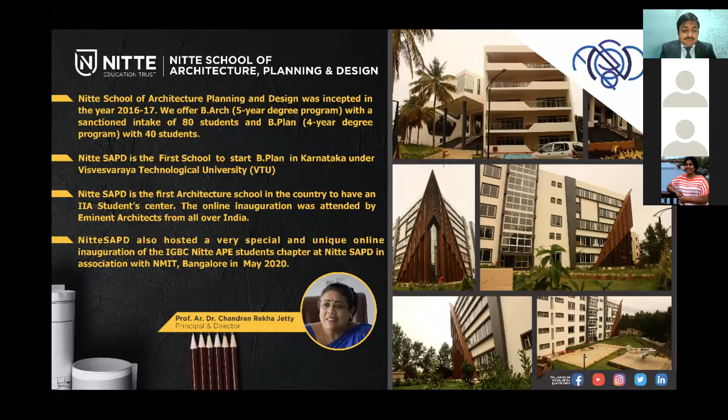We at Nitte School of Architecture are associated with initiatives like this from our inception in 2016. We have focused on doing our bit to promote and facilitate awareness about sustainability, and our students have done many projects in these areas. We do our best to give our students a complete understanding of the social, economical, and environmental implications of going green.

We also have a students chapter of IGBC, which keeps the students well connected to the development. We recently hosted an event, Bigathan, in association with Lawrence Berkeley National Laboratory, LBNL, USA, to launch the Building Innovation Guide for High Performance Energy Efficient Buildings in India, which is expected to innovate the building infrastructure.

The faculty in charge of many such initiatives is Dr. Gayatri, who is in this panel right now, and who is continuously associated with PJMT. It gives us immense pleasure to associate with Prem Jain Memorial Trust.

As you know, Prem Jain Memorial Trust was set up in 2018 in memory of Dr. Prem Jain, father of green buildings in India, as already told by Mrs. Pyle. Its mission is to create, establish, and maintain a sustainability paradigm through education, recognition, and nourishing of our present and future generations. With prime focus on students, they build the foundation of society, and programs that are curated and designed to inspire these young minds to become future torchbearers of sustainable living.

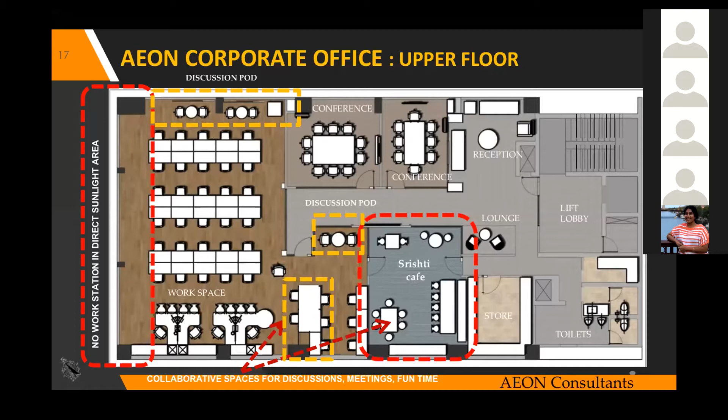While we come on the lower floor, this is how the floor plate looks like.

Similarly, this whole area in the center is again a collaborative space with a standing desk and a library. These areas are made more like a collaborative space, also as part of health and well-being, because people sitting for very long durations at their desk is not the healthiest way of dealing with work.

So standing desks help people take a break and do their work from there itself. Also, similar to the upper plan, on the extreme left hand side we have kept the circulation spaces to keep it as a glare-free zone, not disturbing people. Also, the perimeter spaces invite some heat gains, so we wanted to be away from that.

All the spaces have no internal partition, as you'll see in the photographs that I'll show you, which will make it very clear. This whole area has views to the outside and is receiving daylight, so there's no obstruction that can keep people away from those benefits.

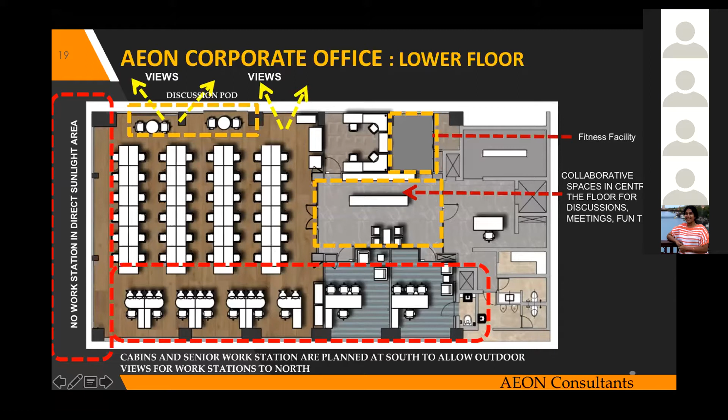All the furniture has been designed considering ergonomic principles in mind. The circulation spaces, distances between the desks, and the areas around them all follow ergonomic principles.

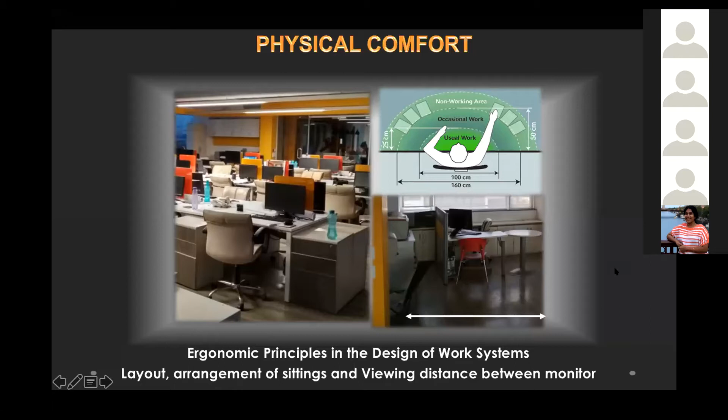This is how the office looks from the center, and this corner is north, as I was talking about. Both sides we have this glazing. It's a leased out office, so even though we didn't have control over changing the glass, it's not the best glass in this building.

But what was definitely in our control is that we can control the heat gains by putting solar films on it. So we installed solar films on all the glasses to reduce the heat gained, while at the same time not compromising on the amount of daylight we get.

Till 5:30 in the evening, there is no corner or space in the whole office that requires use of any artificial light. It's completely 100% daylit office, be it a pantry, a washroom, a meeting room, or the working studio, everything.

And that saves a lot of energy, but daylight also has its own health benefits, as we keep reading in different articles and journals. So the health and well-being concept uses a lot of advantages of daylight, which is helping us in this office. People feel productive and don't get tired for most of the day because of the discomfort we generally get from artificial lights.

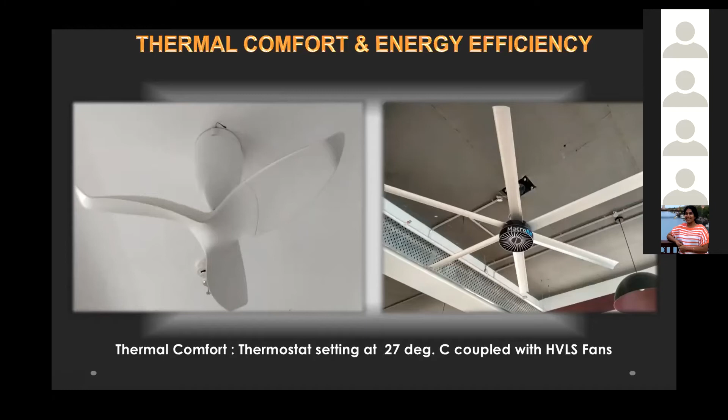This gives us a lot of energy savings while also achieving better comfort conditions for people. Another benefit of these fans is that we can run them not only in summer but also in winter for air circulation, because they are multi-directional fans. We can use them in clockwise direction and anti-clockwise direction also.

For indoor air quality, the image on the right is the fresh air unit, which takes outside air, treats it, and supplies it to the space. On the left is the ESP unit, electrostatic purifying unit, which helps remove pollutants like PM 2.5, PM10, formaldehydes, and VOCs. All of that is controlled through these units, and there are multiple such units installed in the office, helping keep pollutants at the lowest level.

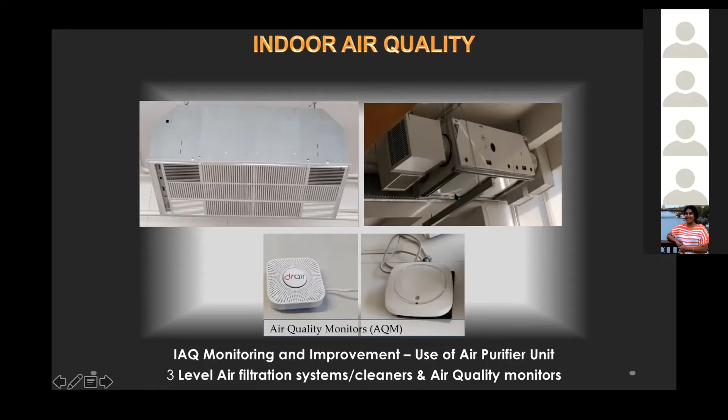Regarding indoor air quality, compared to the pollution levels outside, the amount of pollutants we get inside is quite less. If I take an example of PM 2.5, at an ambient level of around 350-400 units outside, we are able to maintain less than 15 inside, which goes beyond class A category of the IEQ standard. There are a lot of indoor plants and air purifying units helping us maintain these good levels.

From the energy efficiency point of view, all the appliances or electronic items we have, including the ACs, are all inverter-based ACs, and everything is 5-star rated appliances, which helps us keep the energy in check.

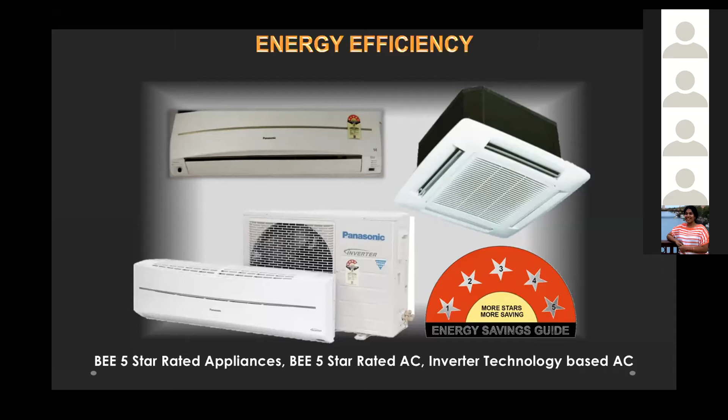These are some energy efficiency measures we've implemented, even though the space is leased out. Whatever we could possibly do to control heat gains, we have done. This is the top floor, exposed to the environment, and we've got underdeck insulation done here, an insulated ceiling reducing heat gains. Also on top of the terrace, we've got high SRI painting done, even though it was not belonging to us.

Inverter based AC units, thermostats as I talked about, HVLS fans, use of LED lights. Even the lighting we use, LED being the most widely used technology today, but how we plan interior lighting is also very important. Just putting a lot of fixtures even with LED won't help, because we have to keep uniform distribution of light, wattage in control, and it should not create glare. All of that has been checked for the lighting design, along with solar films on the glass and 5-star rated equipment.

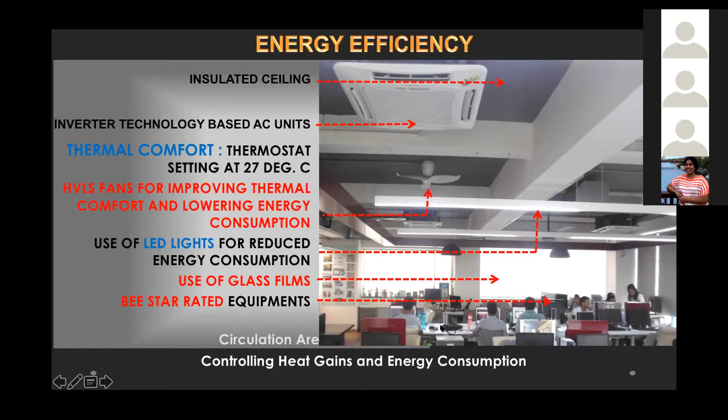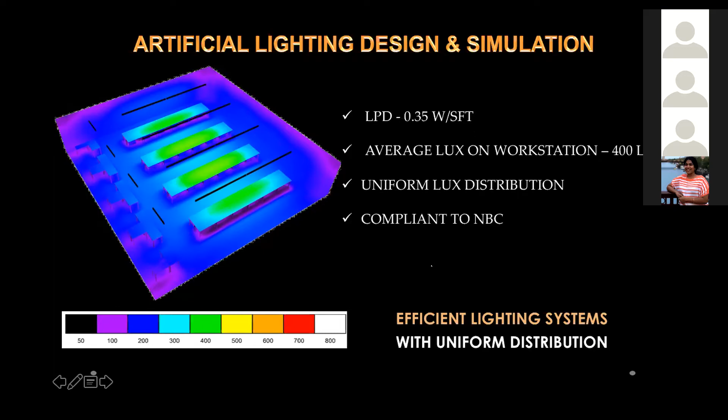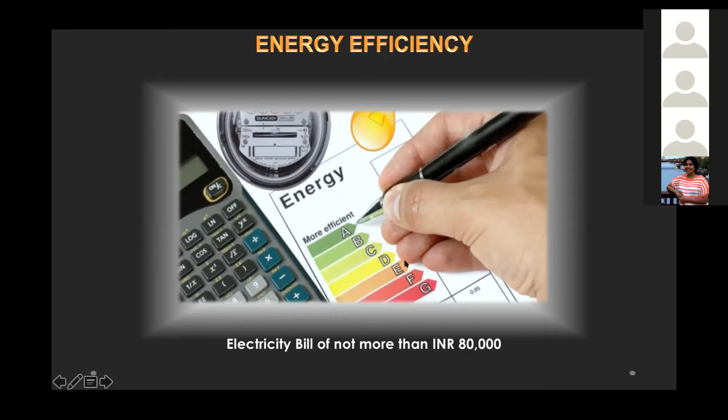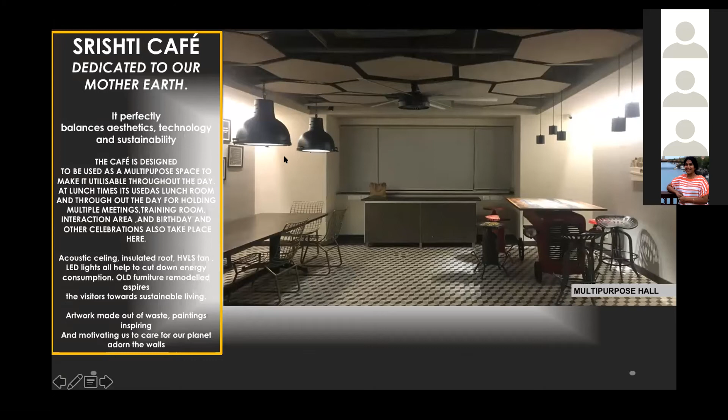All of these signages that you see are installed, some of these are inspirational quotes from the environment perspective, health and well-being, nutritional values, all of that is done.

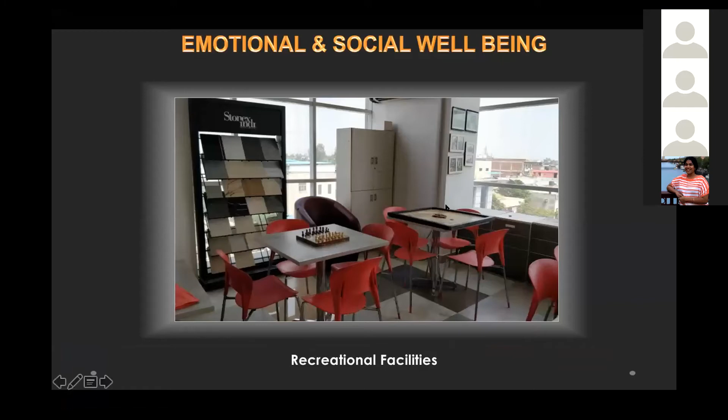We do have got some recreational facilities also embedded in the office, basically to help people use it as and when they need. Water fixtures are all low flow.

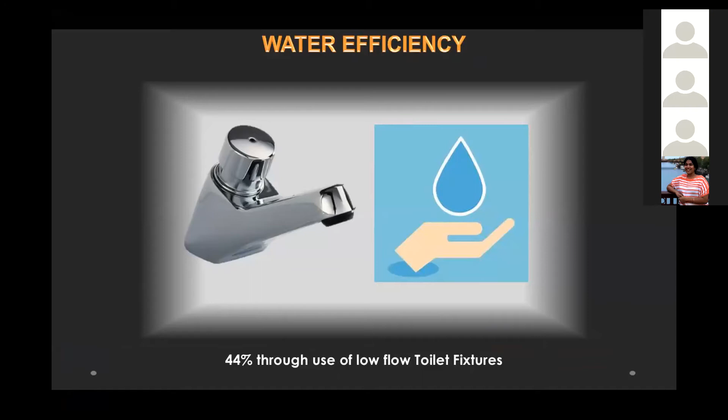There is a study which we got done called geopathic radiation, to negate the negative impacts of any radiation coming out of different electronic equipments or electromagnetic waves that are running through the property.

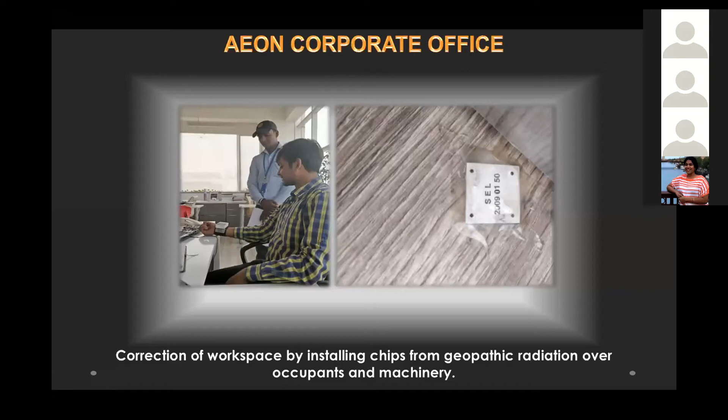That one that you see is basically how we check if it is working or not. There is a pulse rate which is measured before and after this study was done, and there was a neutralization of around 15% that we get, which is again a health related aspect.

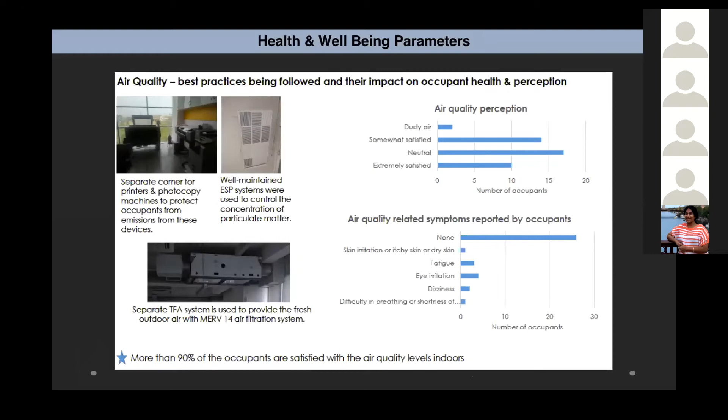And this was a third-party study done by GBCI for the office on different parameters like air quality, noise, lighting, and views. Most of it went through on their scale of measurements, with more than 90% people satisfied in most of these parameters.

That's about it, so we do all of these things in the office. Thank you.

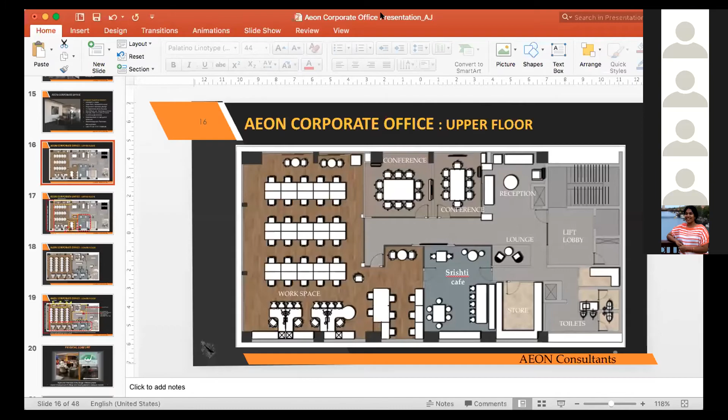So if you see the left hand corner where my cursor is, that's basically north. So we have northwest glazing and northeast glazing. Yeah, so that's how the north is oriented, this corner. I hope the question is answered.

We have one more question. What tools were used prior to the design, and what tools were used to perform glare analysis? Also, did you consider high dynamic range imaging to post evaluate glare? Just a suggestion.

So we did use software for doing the glare analysis. The design software that we have from Rhino - we did the analysis using Rhino and Grasshopper, which was used for doing the glare analysis. I'm not clear on what exactly you mean by high dynamic range imaging.

But we did glare analysis through that. Okay, so we have one question from Nandita. She's asking how effective is the film you used in heat reduction and maintaining indoor quality?

It did help a lot in controlling the heat gains, because the glazing that we inherited in the building from the developer is not the best glazing. It's a single glass that we have, and the heat gains were quite high. When we moved into the office, we did not install the solar films in the beginning, but we experienced a lot of problems with heat gains. After that, we took a decision to install solar films, and after installing it, it was quite helpful in reducing the heat gain, and even the ACs were running quite efficiently after that.

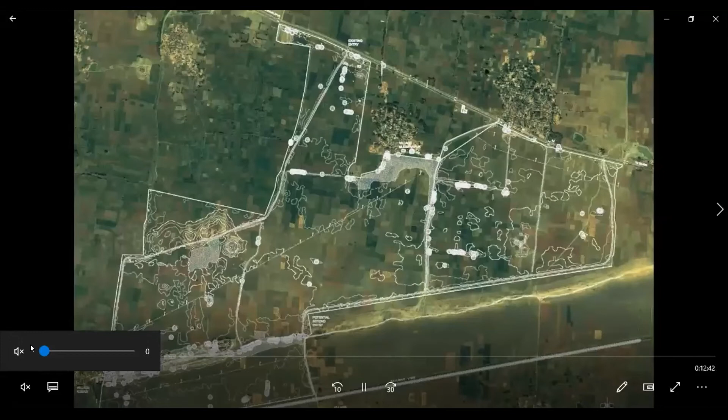If we see this, this is the site plan of the university, and these are the water channels which are running around it.

They have conserved all the water from the site. This is the road network shown here, showing that all the neighboring localities have been attached and interconnected with it.

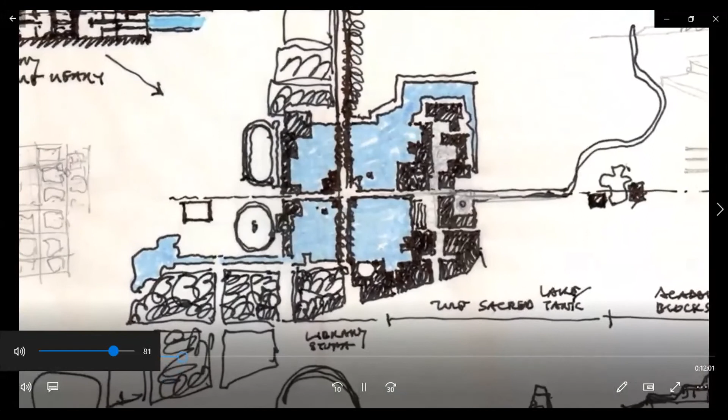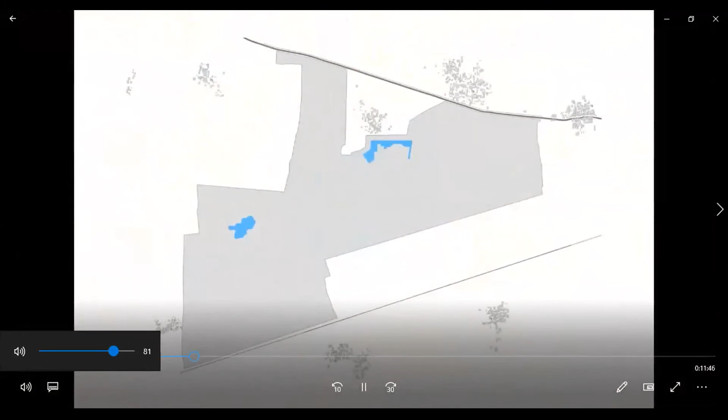If we see how they arrived at this concept, at the center there is a water tank, bisected from the center, and at the center they have provided a library, with water channels running outside through it.

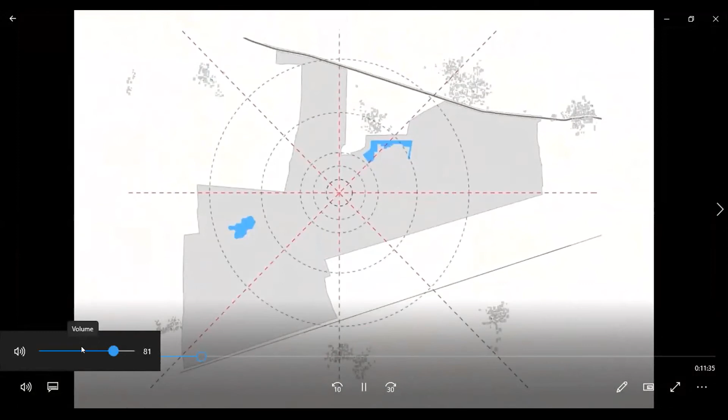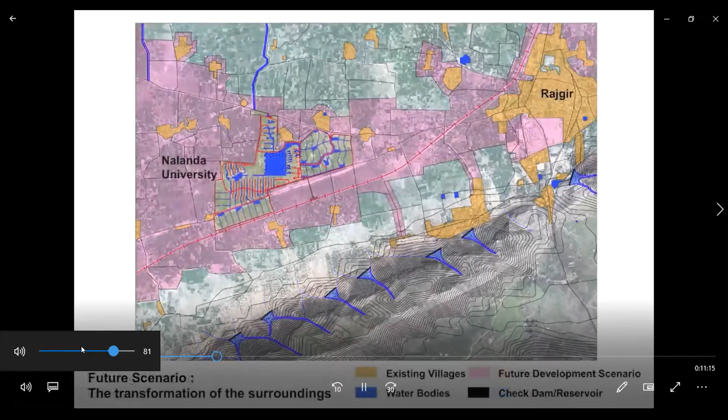These are the Rajgir Hills shown here, and this shows how the water falls down from the Rajgir Hill toward the Nalanda University, and they have planned it so the water would not be wasted.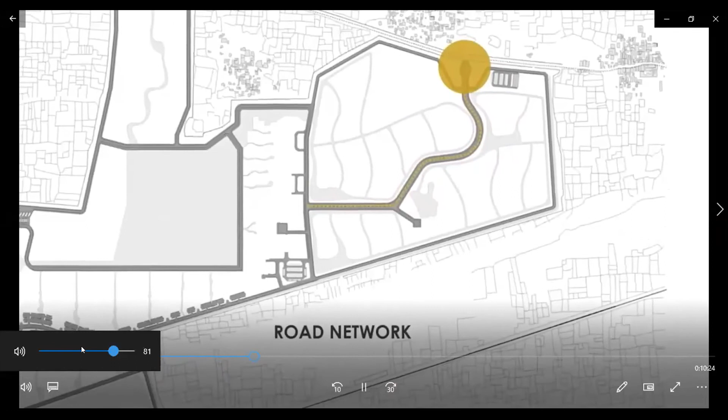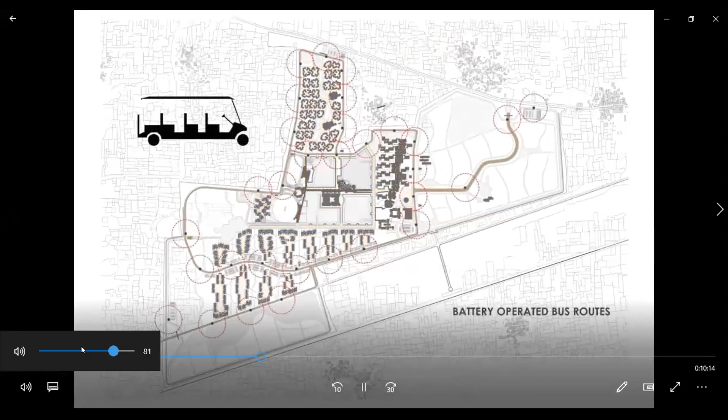These are the main entrances from this side, and the whole site has been designed for pedestrian movement. When you bring your vehicles, they will be taken only to the entrance of the site, and cycling will be available.

So at every 1 or 2 kilometers, there will be charging stations where they can charge and move through the whole site without having carbon emissions.

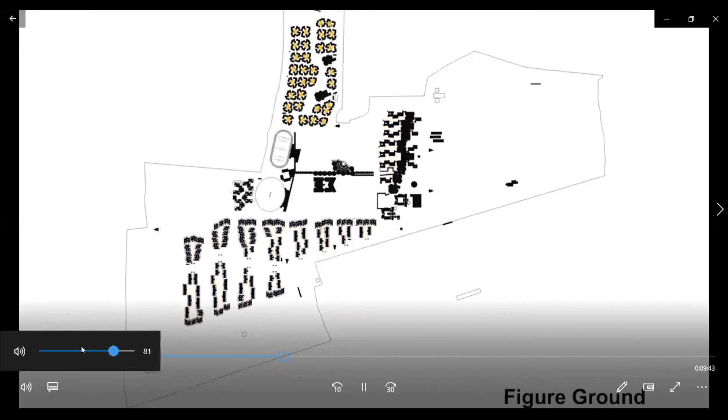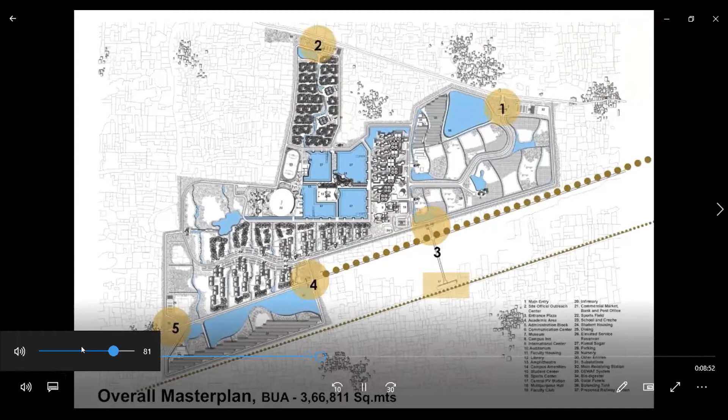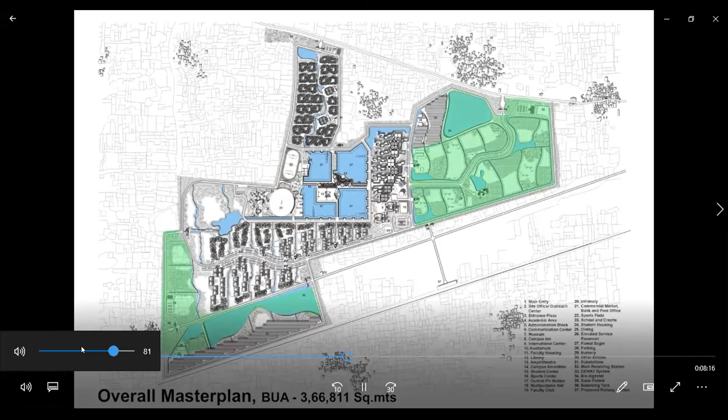On the opposite side, there is a railway station, which is proposed, and 3 entries are given from this side. This 3, 4, 5 is secondary entries. At the center, it's a library, the club area, playway area, and this will be the administrative areas, and classes will be there. And this is the playground, and at the center, it will be a huge, like a market will be there, so student market, and less other, that's green area showing as a landscape area, which will be dedicated only for drought tolerant species and farming.

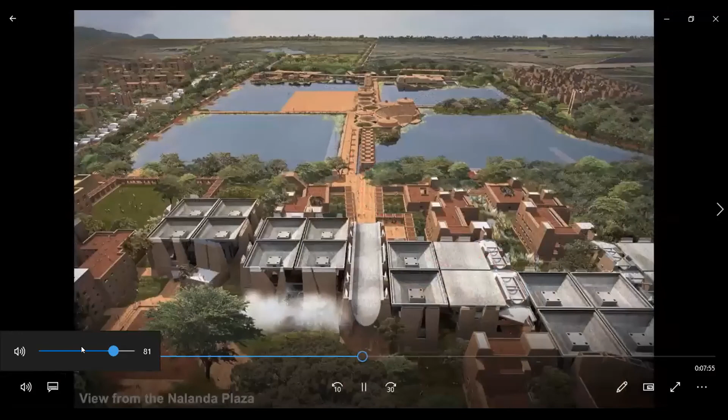We can see in the picture that this is a big, huge water tank at the center, and it is connected with all the amenities, and we can be connected from the campus toward the central library through the market area.

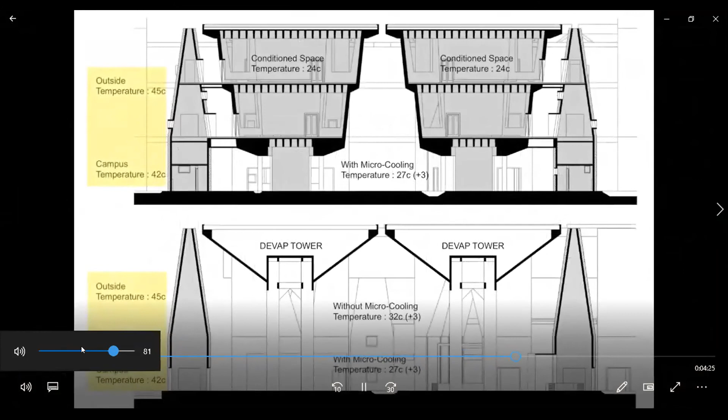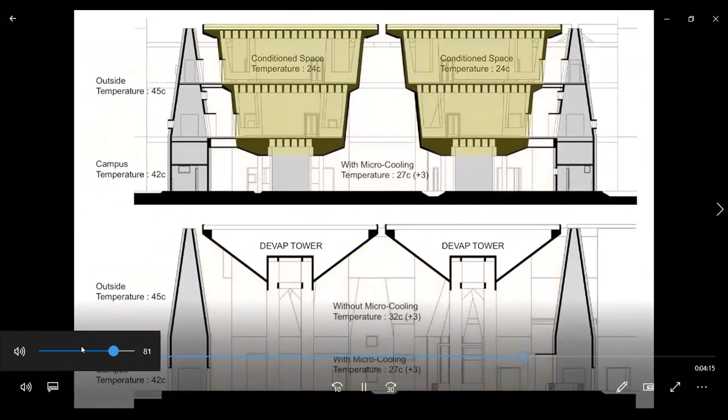And they have provided thick walls in front of this building so that it will reduce the direct heat radiations which come from outside. So they have provided big verandas like structures to reduce the heat gain.

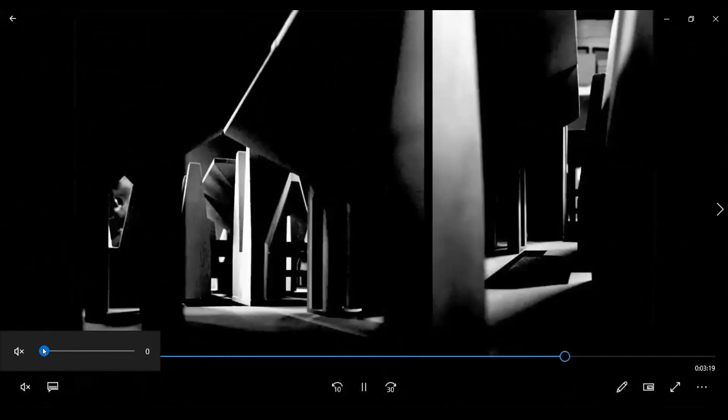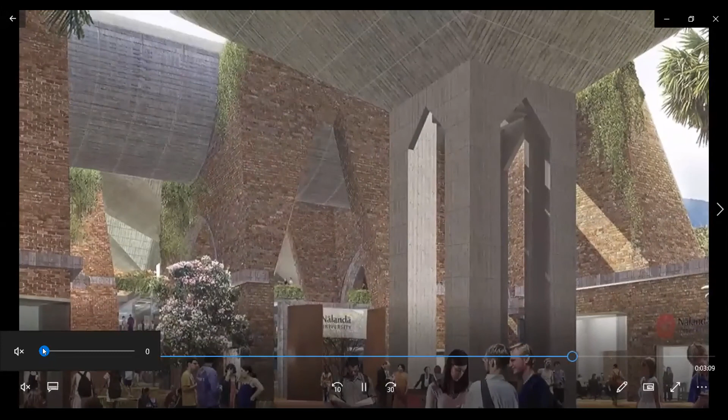So I just have a quick word on this Nalanda University. As you see in this presentation, there are many things involved, like uneven structures - that is how Nalanda is referred. You don't know any distance between the buildings, or the specific height of any buildings - everything is uneven. So right now what you're seeing is the efficient daylighting which you can get inside the building. The building has been made so that not the maximum heat can be gained inside the building - that is the main motive.

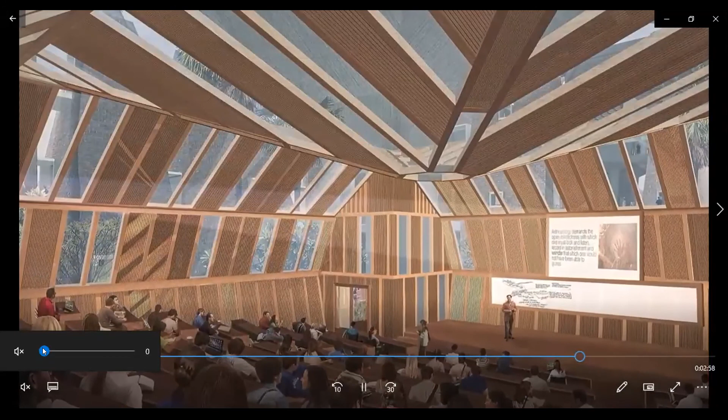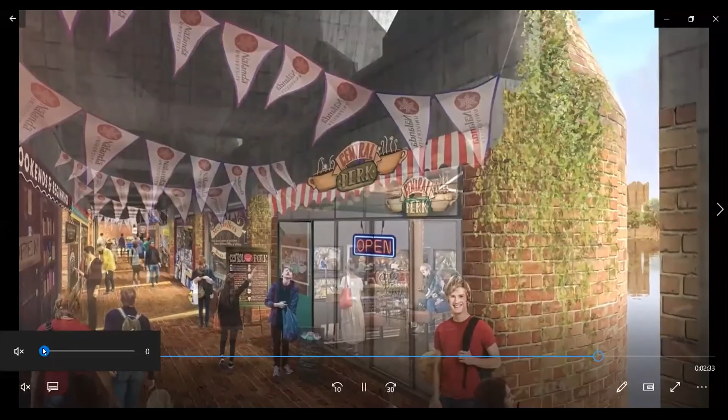So in these pictures, you can see the diffuse light, which is only giving the lighting that will enter the building, and the rays which carry the heat will fall on the outer structure, so that inside thermal comfort can be met. Thermal comfort means the human comfort level. So this is how the building has been modeled in such a way that human thermal comfort has been kept in mind and as a priority.

And these are the pictures showing the club and entertainment areas which they have developed inside the campus itself.

Moreover, this campus is net zero. It's going for a net zero building in which the energy they are consuming will be generated on site itself. As of now, based on the basic calculation, they come out to be around 7.5 megawatt. So in addition to it, we have proposed biogas also.

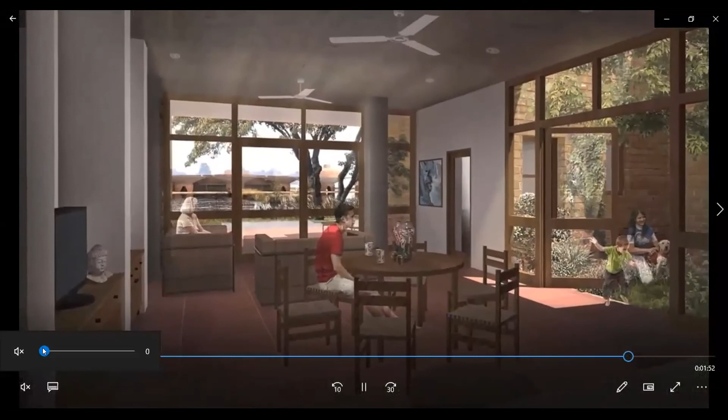So these are some residential complexes you can see in the picture.

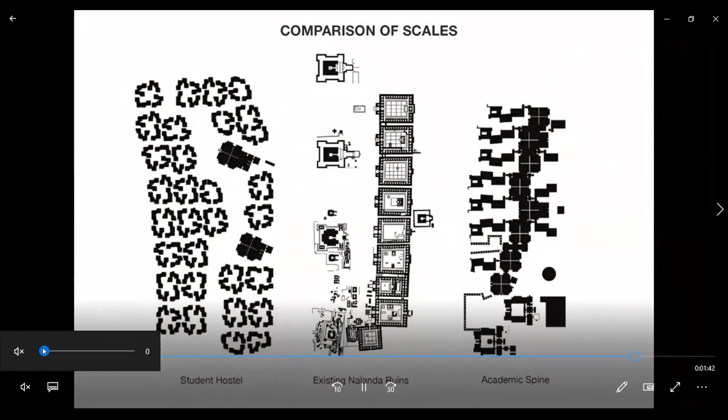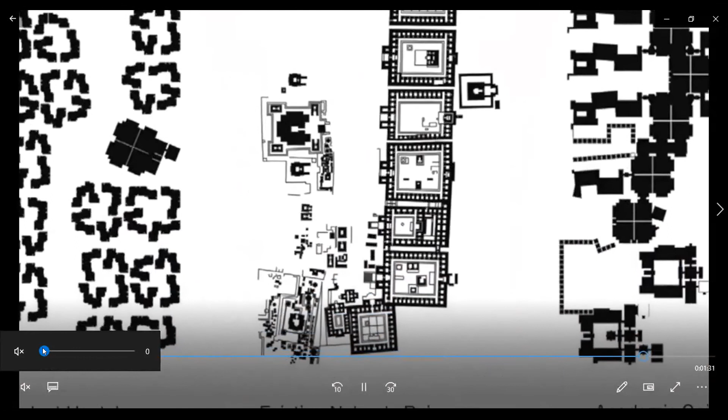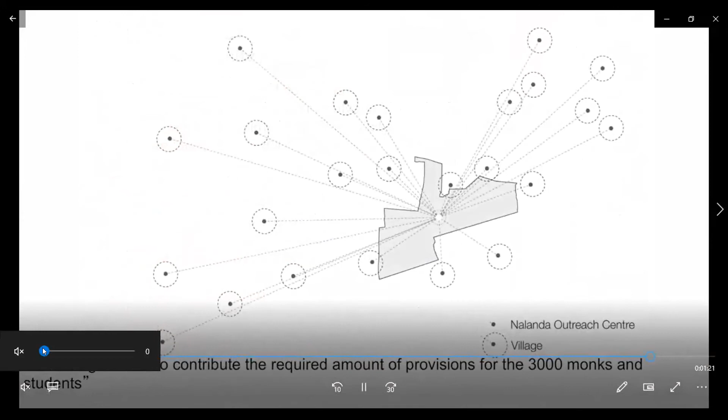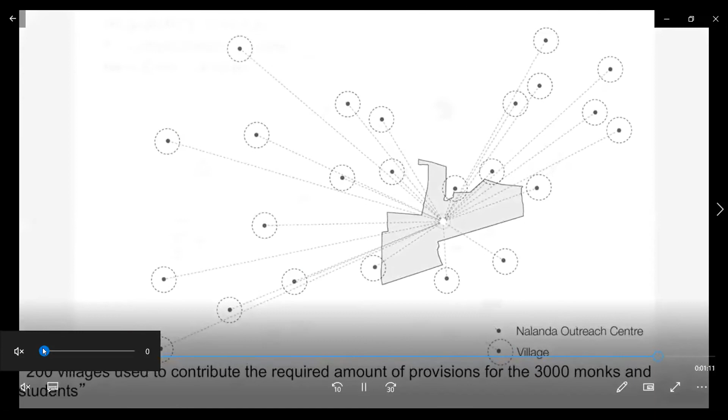In addition to that, regarding the energy, we were seriously working on low energy HVAC systems. In terms of low energy HVAC systems, in the market you can see many HVAC systems like chiller, VRV system, and a lot more things in terms of split AC package unit. But here we seriously need to work on the low energy HVAC system, in which we have designed the desiccant enhanced evaporative cooling design in this building.

So you can see more pictures on that also. This is how I'm telling that it's a net zero campus, with efficient HVAC systems like cooling tower, chiller, AHU. Apart from that, we have used desiccant evaporative cooling also.

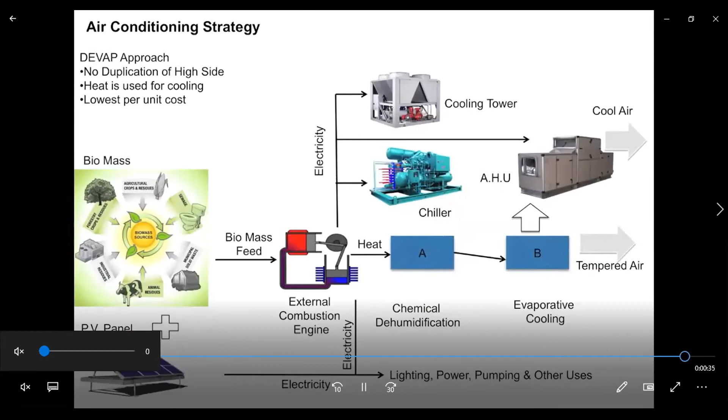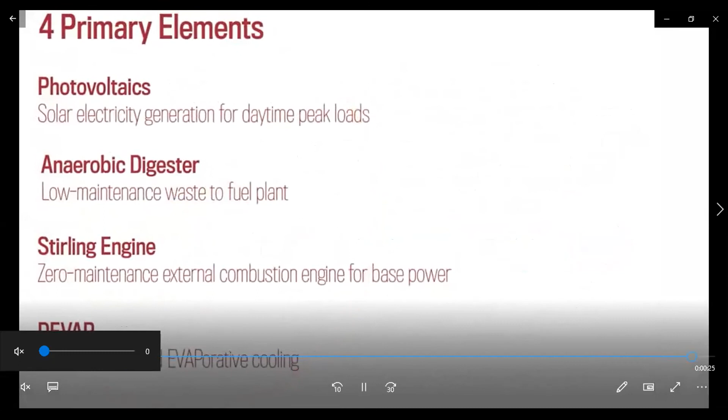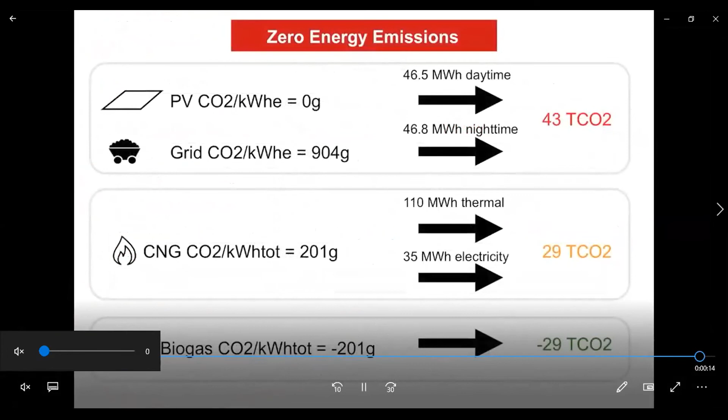So desiccant evaporative cooling is nothing but whatever air is taken from outside, from that air the water vapor will be taken out using the desiccant liquid, and then it will pass through non-contact, that is indirect evaporative cooling, in which water will flow through tubes and air will be passed through that, and then finally the chilled air will come outside, which will be supplied to the space or the room or academic space.

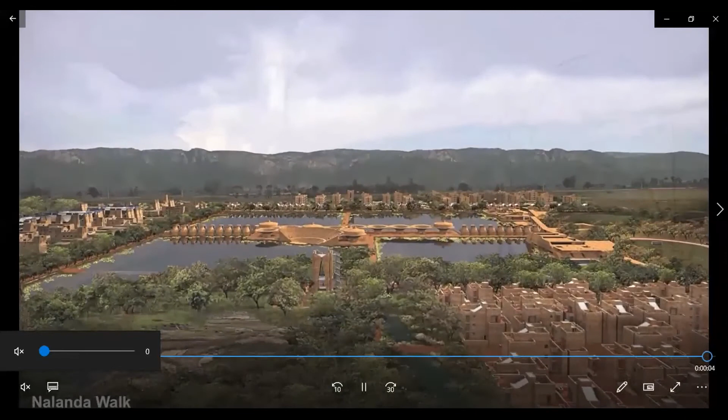So this is how this DEVAP HVAC system works, and that's how we have reduced the energy consumption, and that energy consumption has also been offset through solar PV and biogas technologies. So this is what we just want to highlight - this is one of our prestigious projects which we are working on, Nalanda University.